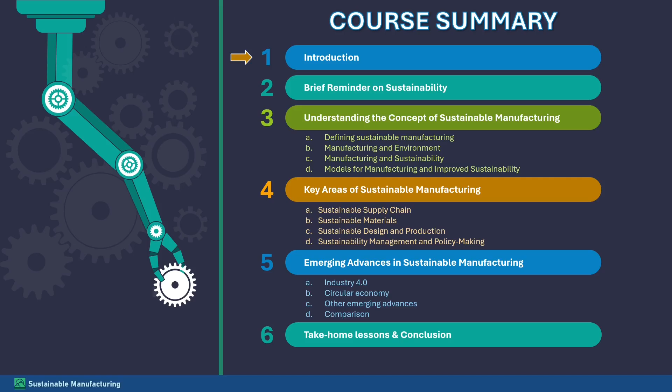Being responsible for over 20% of accumulated greenhouse gas emissions, the manufacturing sector has been the third major contributor to the overall global environmental pollution, as shown in the figure. Given the high awareness of the need for better quality of life, the socioeconomic impacts of manufacturing activities are also globally recognized.

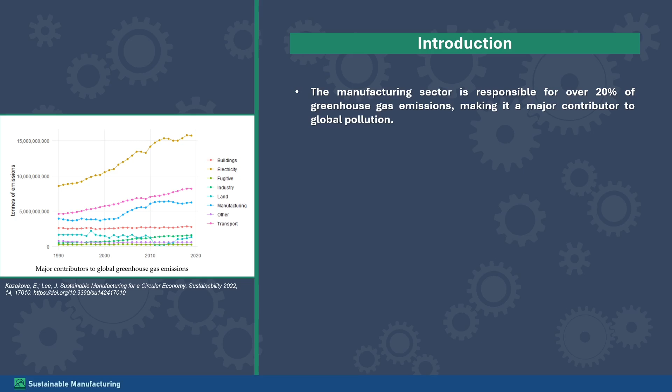According to the UN Environment Programme report, both the production and the consumption sides of the industrial cycle carry significant harmful impacts on the environment in the form of toxic gases and acidic substances released, as well as the immense drainage of non-renewable resources.

Although most of the deterioration can be credited to the direct emissions stemming from chemical reactions and from leaks from industrial equipment, indirect outflows also take up a substantial portion of the damage, with not only the energy supply needed for running the factories, but also the additional wastage created as a product of mass consumption.

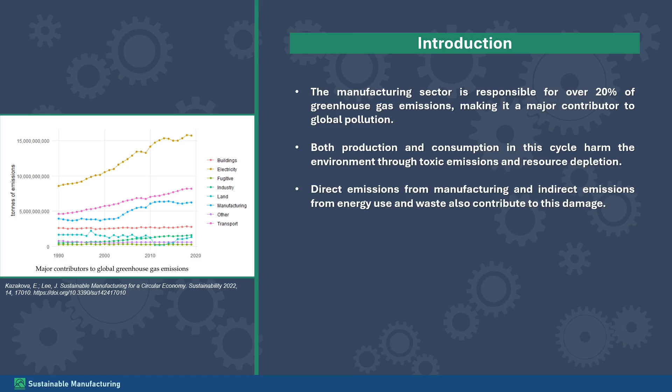Hence, manufacturing processes and the industrial supply chain are among the most damaging factors where timely industrial action and policy intervention are crucial.

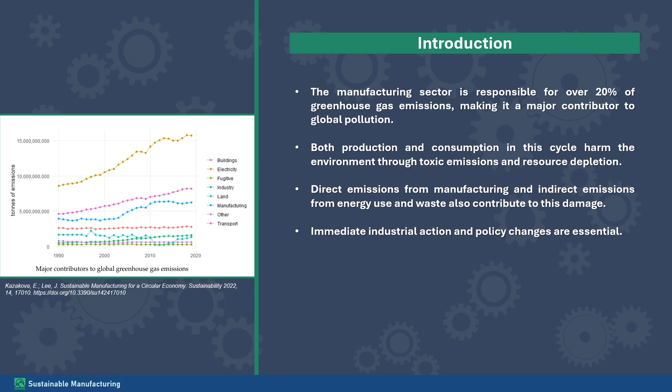While fossil fuels are mostly used for energy to power industrial activities and produce goods from raw materials, most of the emission-reducing technologies, such as carbon capture and storage, are still not in the mature stage of deployment.

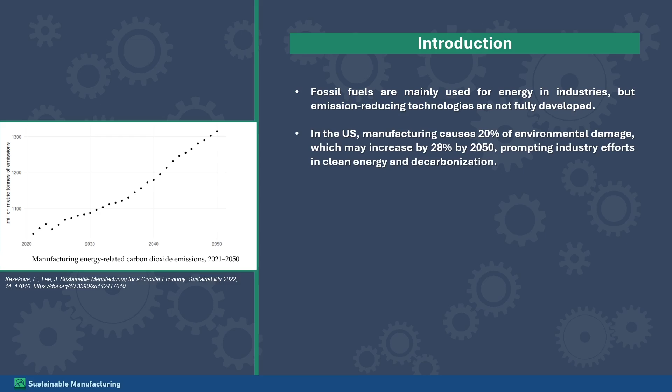For instance, in the US, the environmental damage caused by manufacturing takes up roughly 20% of the total deterioration and is predicted to increase dramatically by around 28% in 2050, given the ongoing trends of intense economic growth. The industry is constantly driven to take initiative in clean energy deployment and deep decarbonization.

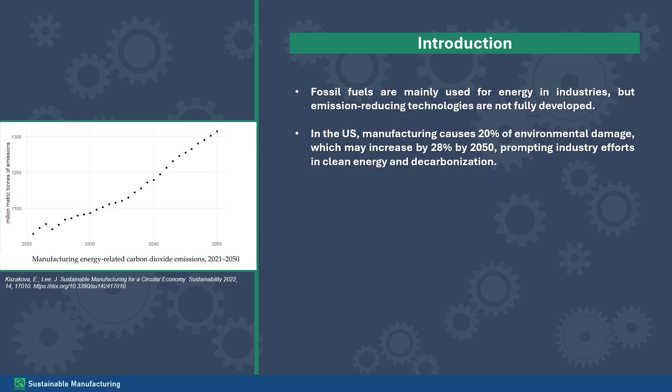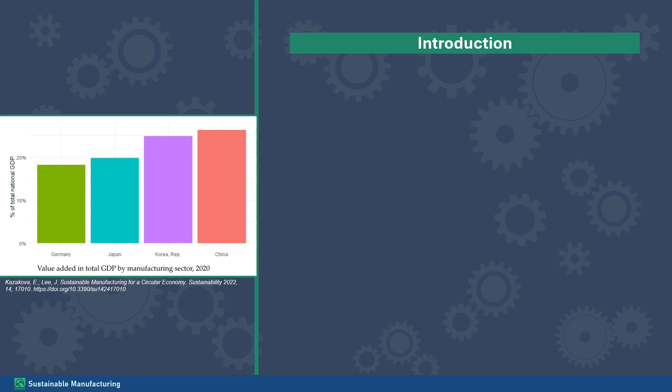In addition to the environmental issues, the manufacturing industry makes significant economic and social impacts. In major manufacturing nations such as China, Germany, South Korea, and Japan, the industry accounts for approximately 20% of GDP.

The US manufacturing sector hired about 12 million workers in 2019 and accounted for almost 11% of the total output of the economy in 2020.

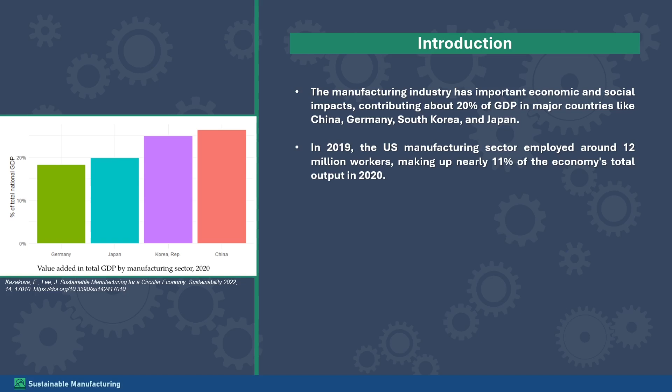With such continuous growth in the sector, both in terms of incoming investments and value, as well as the industry's significant role in ensuring societal well-being through stable labor expansion and overall national and worldwide economic development, it becomes evident that the idea of sustainable manufacturing encompasses areas beyond simple eco-friendly characteristics of production.

To clearly demonstrate the corporate initiatives, over 95% of the world's largest companies now report on environmental, social, and governance, as well as managerial achievements, with more than 70% pinpointing sustainability as a major competitiveness determinant in the current market and a crucial factor for profitability increase and cost reduction.

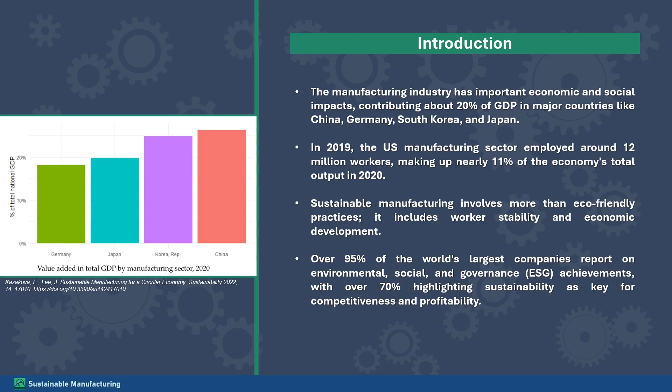Consequently, the motivation of this course is to investigate the theoretical and practical basis for sustainable manufacturing, beyond the simple production of goods with minimum use of energy and natural resources and maximum profit, into economic and social dimensions that touch upon the human factor based standards for equity and equality and corporate responsibility.

The objectives of this course are to update the industry, policymakers, and various stakeholders on the broader scope of sustainable manufacturing in the current circumstances, and to report its latest practices to be taken into consideration for further innovative explorations and actions both within the academia and the industry.

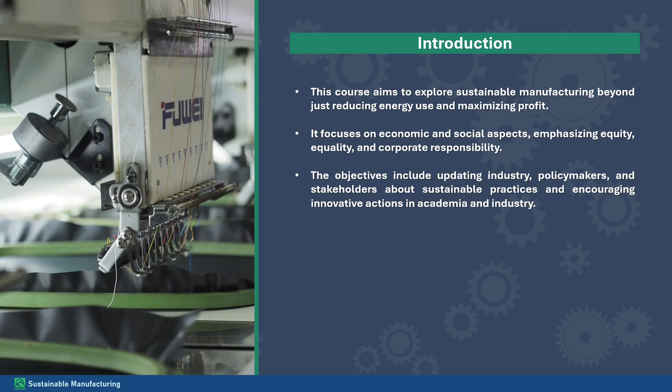This course is based on an overview of the latest studies and analysis of leading company cases on sustainable manufacturing terminology and initiatives.

The analysis includes the latest research and articles from scientific and business journals on sustainable policies from governments and international agencies. The reviewed cases are recent, innovative, sustainable actions initiated by global actors in key sectors such as retail, textiles, food and beverage, IT industries, and much more, which are reflected in the company's corporate business and ESG reports, as well as official statements communicated by the management through digital channels.